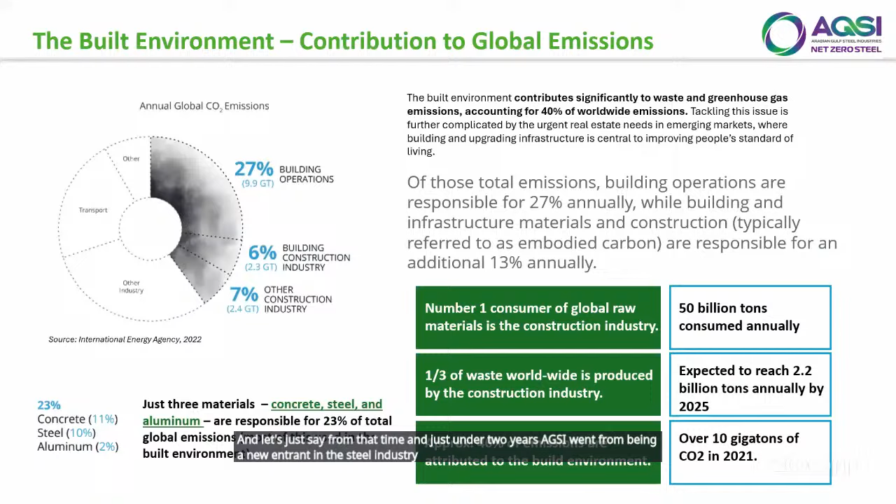Then by 2021, we decided to include our own rolling mills for making rebars and sections. And from that time, in just under 2 years, AGSI went from being a new entrant in the steel industry to the first carbon neutral steel plant.

So just to sum up our journey, we joined the UAE Sustainable Companies Pledge, being certified twice for lowest carbon emissions in the MENA region, participation in COP28 and Climate Week NYC as a net zero case study, becoming one of the chosen champions of the Industrial Transition Accelerator, focused on decarbonizing hard-to-abate sectors like steel, cement, and heavy manufacturing,

developing collaborations and partnerships with big players in the industry, like Aldar, Sea Institute, and soon many more to follow. This journey reflects our belief that industrial growth and sustainability are not mutually exclusive. With the right technologies and commitment, it is possible to scale green manufacturing in high-impact sectors.

Now we go to the key facts about AGSI. We are currently the largest private sector steelmaker in the UAE, apologies. What sets us apart is our fully integrated production model. We don't just produce steel. We manage the entire value chain, from scrap collection and processing to billet production, and finally to rolling to rebars and sections. This integrated approach has several technical and sustainable advantages.

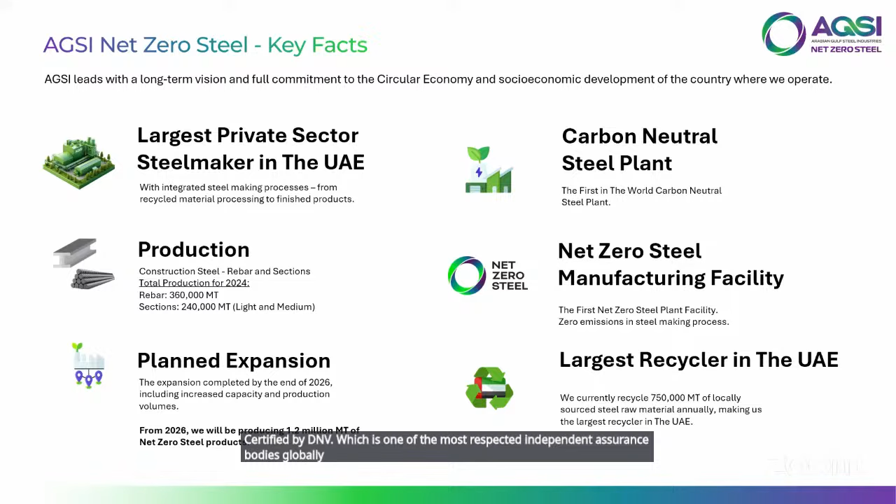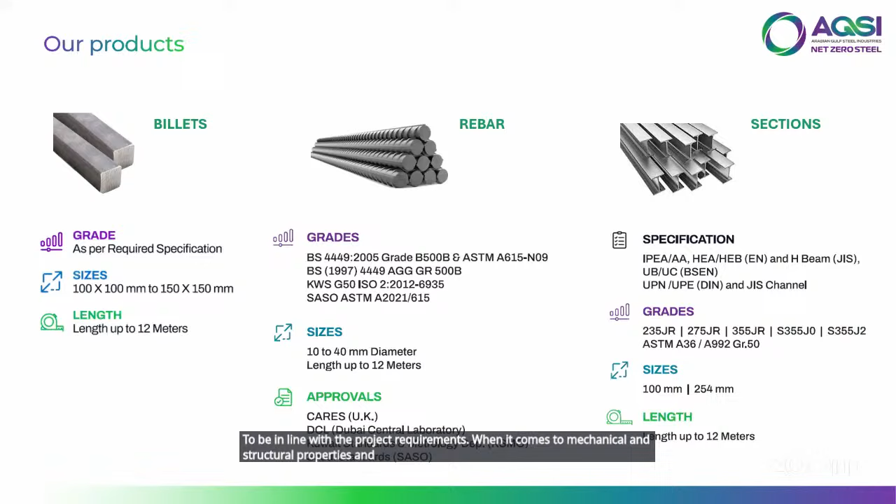So just to reiterate, AGSI produces the following: billets, rebars, and sections. All products are tailored to meet the international codes and standards to be in line with the project requirements when it comes to mechanical and structural properties and available grades and sizes. So let me go in one by one. How billets are made, first of all.

In AGSI, there are around 6 main procedures that are important for producing the low carbon steel billets prior to rolling. We begin with the 100% locally sourced steel scrap, which is brought to our facility in large volumes, minimum 50,000 tons per month. Once the raw materials are received, it enters the scrap yard where it is unloaded and sorted based on type and composition, and processed using specialized machinery like shears, shredders, and magnets to meet furnace stock

specifications. On average, we process around 1,200 tons of scrap per day to feed our steel melting operation. This ensures that there is consistent melt chemistry and energy efficiency in the furnace. Third is the most important part. The prepared scrap is then charged into our induction furnace technology. We operate a total of 4 furnaces, each with 30-ton capacity and 12 megawatt power rating.

Unlike traditional blast furnaces or electric arc furnaces, induction furnaces do not burn fuel. Instead, they use electromagnetic induction to generate heat directly within the metal. Thus, no oxygen will be required, as it will be fully operated through electricity. This results in no CO2 or other greenhouse gas emissions whatsoever, more precise control over melt temperature, lower heat loss, and faster startup times. This is the cornerstone of AGSI's net zero strategy: clean, efficient, and scalable steel melting.

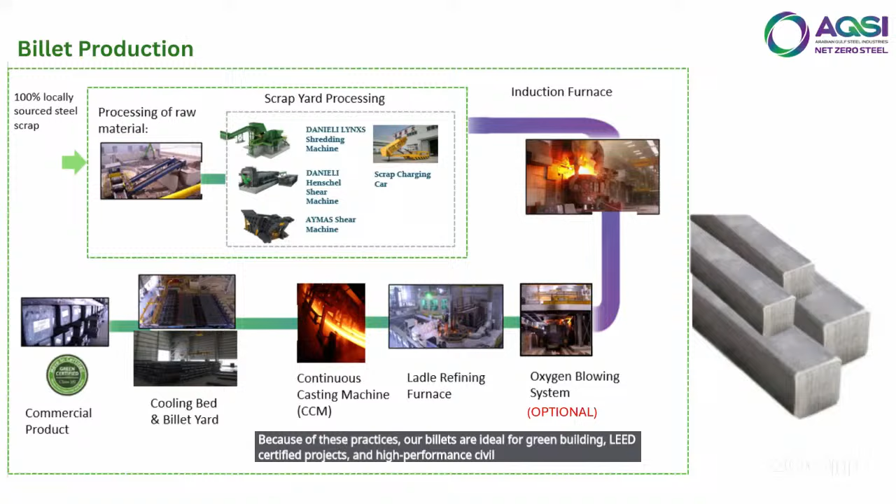Now let's delve into the rebar mill process. The first stage is the reheating furnace. Here, the cold billets are fed into a high temperature furnace where they are heated uniformly to about 1,100 degrees Celsius to 1,250 degrees Celsius. The purpose of this is to soften the billets and make them suitable for plastic deformation. Uniform heating is crucial not just for rolling efficiency, but also to prevent internal stresses or non-uniform grain structures, which could compromise the final mechanical properties.

Once the billets exit the furnace, they enter the rolling mill stands. These are multiple rolling passes arranged in sequences of roughing, intermediate, and finishing stands. This is where the billet's cross-section is progressively reduced. At AGSI, our rolling mill is designed for high throughput and dimensional accuracy. The billet is transformed from a solid square profile into the round ribbed profile of a rebar, and this happens at speeds that can exceed 15 meters per second. The rib patterns are essential for bond strength with concrete. They are rolled directly into the bar during the finishing stand phase. Rib geometry is precisely controlled as per international standards such as BS 4449 or ASTM A615.

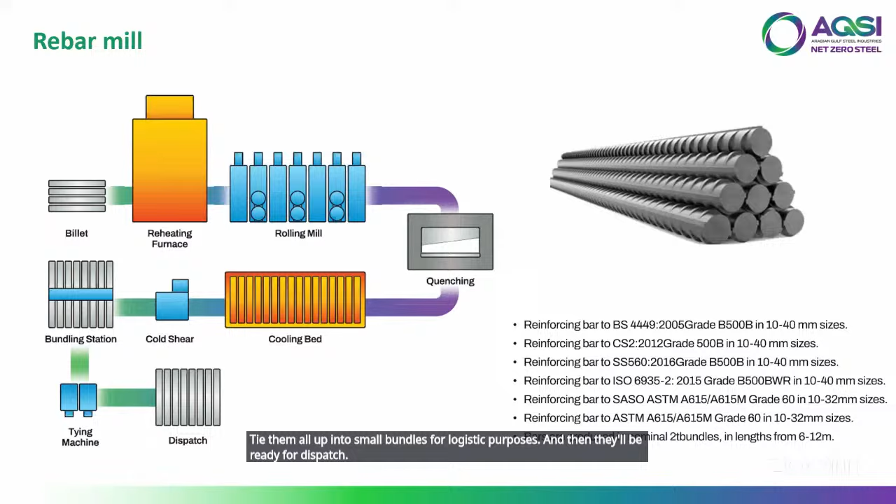Now, just to show you the insights of this process, first of all, the QST treated rebars offer superior weldability and lower carbon equivalency compared to traditional microalloyed rebars. Our rebars undergo routine tensile, bend, rebend, and fatigue tests as per international standards. We can produce grades up to 600 megapascals of yield strength, suitable for high-rise and infrastructure. This is very important because it supersedes the standard requirement. And this is because our process is fully reliant on 100% recycled scrap and zero carbon induction melting.

We don't just do these tests internally. We make sure that our findings are backed up by certified third-party agencies before commissioning to our consumers. This is an official comparison table of our full range of rebars detailing that we comply with and supersede the standard requirements. As you can see here in the mechanical properties section, our rebars are much stronger than the conventional steel.

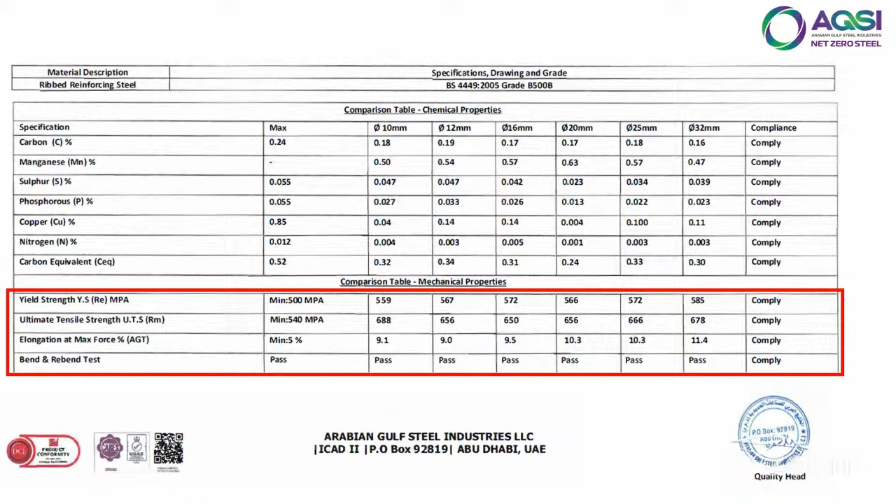Last but not least, we'll talk about the section mill. It is relatively the same as the rebars, but has some extra processes due to its complex design. At the beginning, the billets will go to the reheating furnace, and the same application applies.

After the reheating furnace, the billet enters the reversing mill. Unlike a continuous mill, this system consists of a set of rolling stands where the billet is passed back and forth multiple times, with the roll gap adjusted in each pass to achieve a desired shape. This multi-pass reversing process allows for a gradual and controlled reduction in thickness and width, which is especially beneficial when rolling complex profiles.

This also gives us flexibility in roll configurations and allows us to roll both symmetric and asymmetric sections. After the reversing process, the semi-finished profile enters the finishing mill. Here, the geometry is finalized and surface finishes are improved. At this stage, the exact dimensions of flanges, webs, or edges are refined to within millimeter level tolerances. What makes this step special at AGSI is the capability to change roll sets quickly and accommodate different section profiles.

The next step, which is the same as in the rebars, is the cooling bed, where the finished sections are laid out under ambient air. Once cooled, the profiles are passed through the straightener. This machine uses a series of adjustable rolls to correct any remaining curvature or camber in the product. Straightness is critical, especially for structural applications, and the AGSI plant is capable of achieving tolerances well within the desired standards for dimensional accuracy.

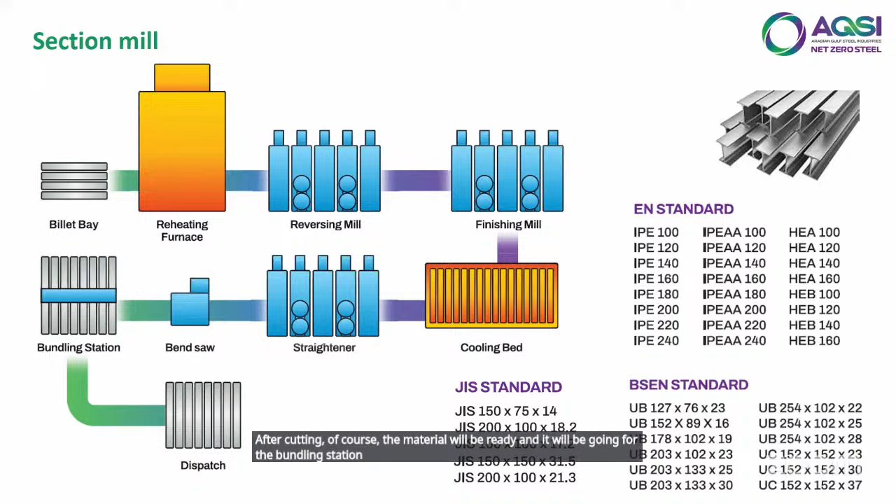So some insights on the section mill. The reversing mill setup is particularly efficient for low volume or custom profile production, ideal for infrastructure, OEMs, and modular steel systems. AGSI uses low carbon steel grades with high weldability and ductility, making them suitable for seismic zones. Our rolling is backed by mechanical testing like Charpy impact, UTM tensile, bend, and macro etching to verify grain structural integrity. Sustainability is embedded into this process where there's zero fossil fuels, zero carbon melting, and energy recovery systems in the furnace.

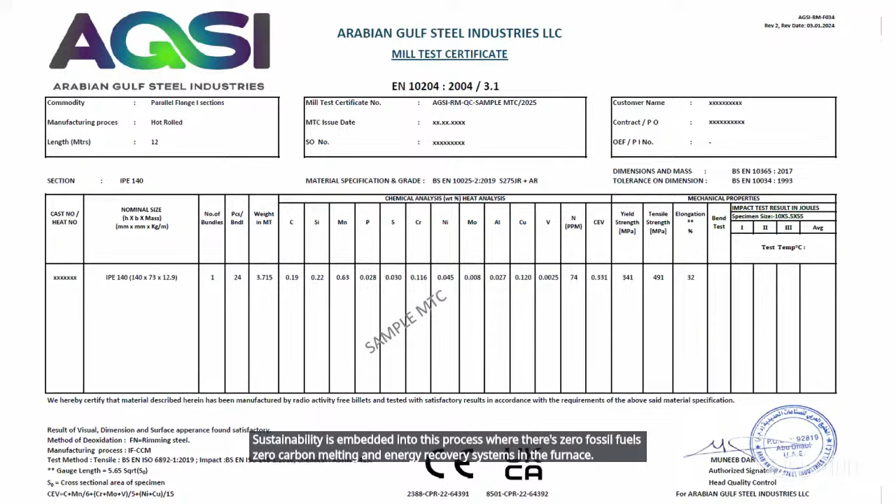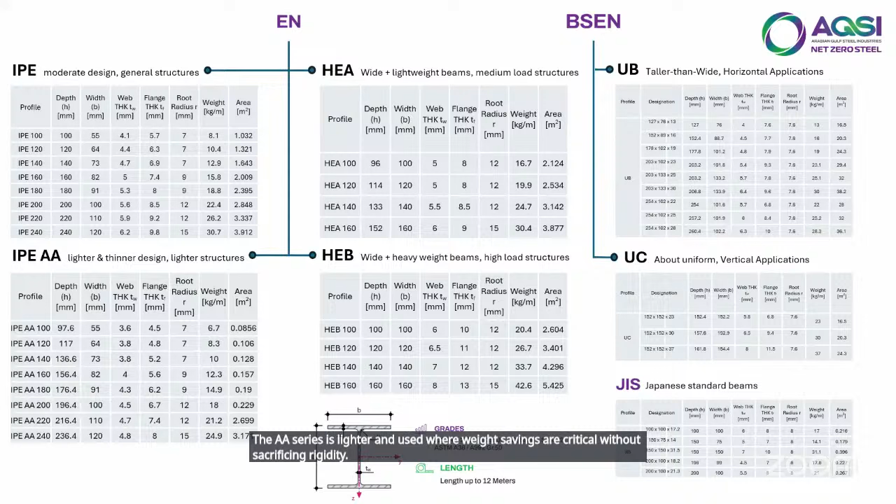Now, before I end this topic on the sections, the slides detail the sections that we offer and some of their applications. So in general, we have the IPE, IPE-AA, HEA, HEB, UB, and UC profiles. The IPE and IPE-AA beams are ideal for floor beams, secondary framing, and general structural use. The AA series is lighter and used where weight savings are critical without sacrificing rigidity. The HEA and HEB beams are wide flange beams. HEA is optimized for medium load structures, while HEB offers higher load capacity, specifically in transfer beams and bridge decks.

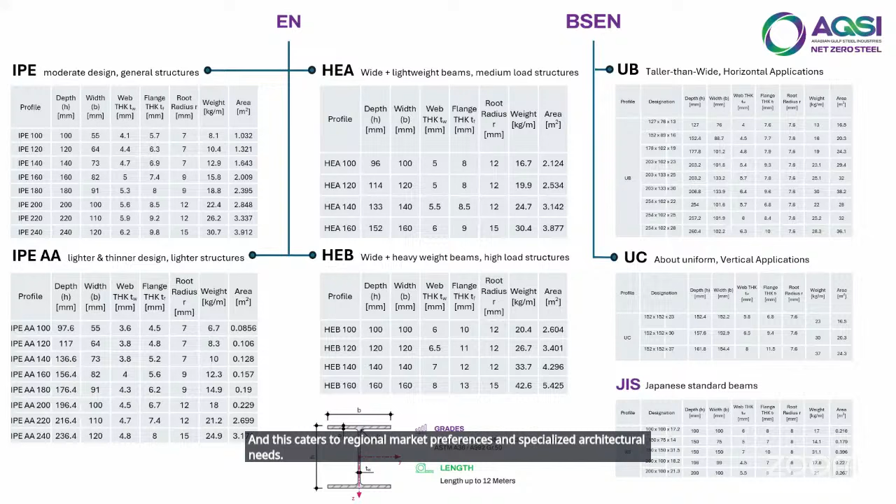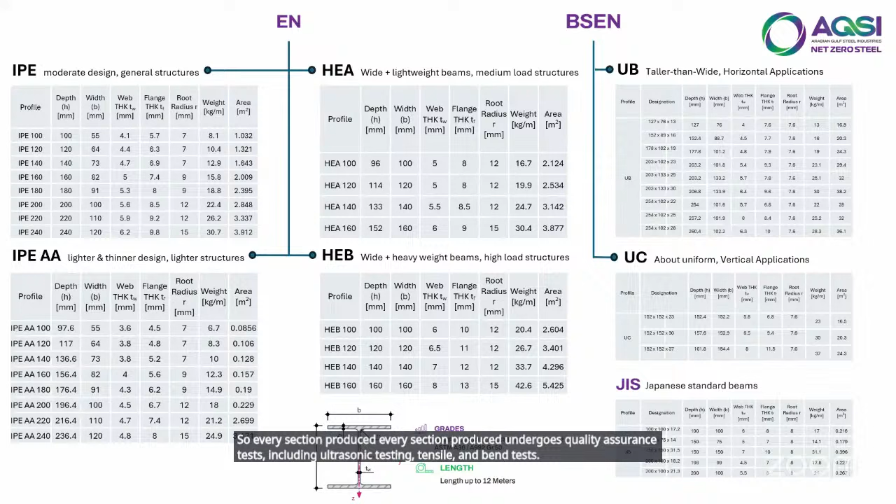UB, or universal beams, are taller than they are wide. These are ideal for spanning applications like bridge girders and long span trusses. Universal columns are nearly square in dimension and are used as vertical load-bearing members in buildings and towers. We also offer the JIS profiles, which stands for Japanese Industrial Standard, and this caters to regional market preferences and specialized architectural needs. So every section produced undergoes quality assurance tests, including ultrasonic testing, tensile, and bend tests, to guarantee performance with regional and international structural steel codes.

Just to give you an interesting fact, globally, over 630 million tons of steel are recycled annually. Every ton of recycled steel saves around 1.5 tons of carbon dioxide, 1.4 tons of iron ore, 0.6 tons of coal, and 0.05 tons of limestone. Using recycled scrap reduces energy consumption by up to 74% compared to using virgin iron ore. AGSI processes around 40 to 50,000 tons of local scrap per month, enough to build the steel structure of a Burj Khalifa-sized tower every 45 to 50 days.

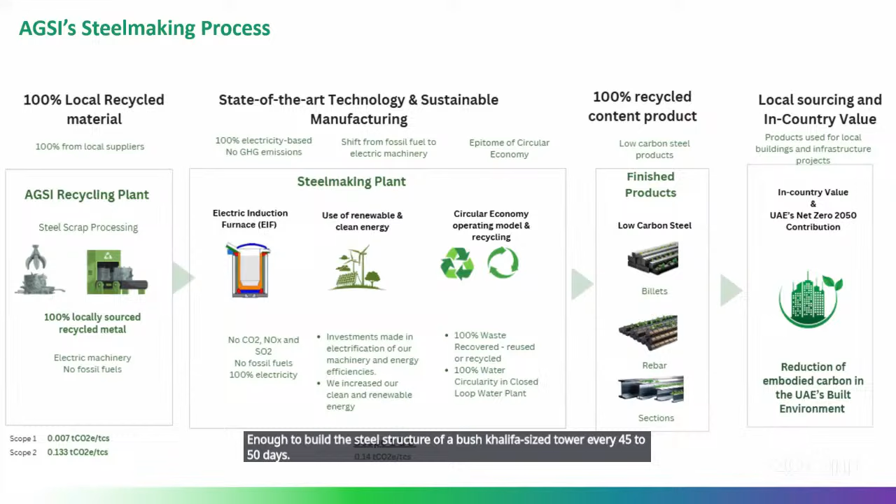Our carbon neutrality is the result of real, measurable reductions in process emissions. As mentioned before, the key to this lies in our use of the induction furnaces, which operate without fossil fuels, unlike traditional blast furnaces, which rely on coke, a high carbon fuel, to reduce iron ore into molten iron. Because we rely exclusively on 100% recycled scrap and use renewable electricity for minimal offsets, we eliminate Scope 1 and Scope 2 emissions from the production cycle.

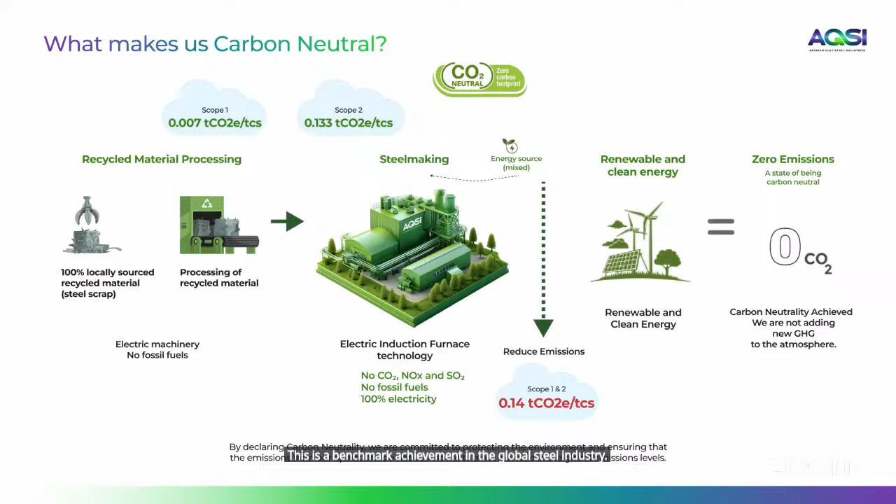Another method of secondary steel making is the EAF route, or the electric arc furnace route. True, this method will use 100% recycled steel scrap, but the arc furnace will require oxygen to provide the heating and efficiency needed for a well-produced finished product.

Primary steel making is still being used, but not recommended, especially in this region. They would need to extract molten iron from iron ore, and this requires huge amounts of energy and oxygen, resulting in immense loads of emissions.

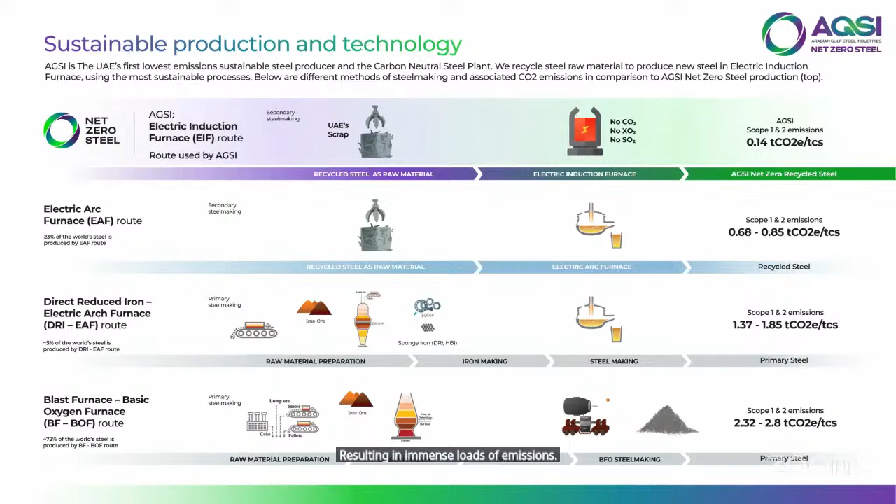As mentioned before, we commissioned independent audits by DNV to validate our net zero claims. These audits were conducted in line with two gold standard protocols, the ISO 14064-3 for greenhouse gas accounting, and the PAS 2060 for carbon neutrality certification. These certifications confirm that our operations from raw material input to final product produce zero net emissions.

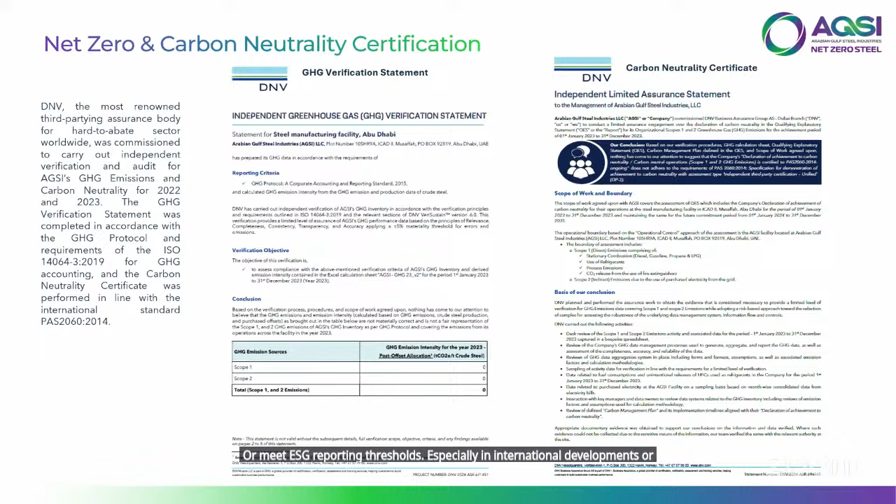What's even more important is that these reductions are real, measurable, and replicable, not based on future promises whatsoever. That's critical for projects that want to secure sustainable financing or meet ESG reporting thresholds, especially in international developments or LEED certified buildings. So just to show you our other product quality conformity certifications in line with the local requirements for projects in the GCC and even the UAE.

Now we go a bit about ESG. Our model follows the principles of infinite circularity in steel production. We use 100% recycled steel waste, avoiding virgin ore extraction. All waste and byproducts like mill scale, slag, and fumes are reused or recycled into industrial inputs like cement.

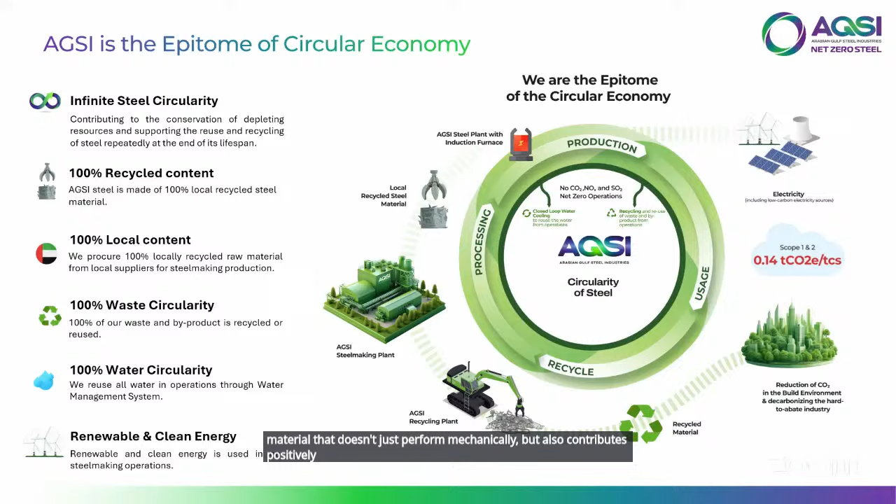Most importantly, our electricity supply is powered by clean and renewable energy, which is a critical enabler of low emission steel. This means specifying material that doesn't just perform mechanically, but also contributes positively to your project sustainability and life cycle assessments.

AGSI's strategy is not just about carbon reduction, it is a complete environmental, social, and governance transformation, aligned with the UNGC, or United Nations Global Compact, Sustainable Development Goals and the 2030 Agenda. Some of these goals include, but are not limited to, industry innovation and infrastructure, responsible consumption and production, climate action, clean water and sanitation, affordable and clean energy, and partnerships for the goals. And these involve collaborations with climate groups and industrial platforms. This global alignment gives added assurance to international consultants and developers looking to source from socially responsible suppliers.

Now, how are we contributing to LEED? Why sustainability for buildings? That's the main question here. Sustainable buildings reduce energy and water use, cut carbon emissions, and lower operating costs. As a result, they can boost property values up to 26%, increase occupancy rates to 96%, and tap into a fast-growing green finance market, while also enhancing brand value and demonstrating leadership in sustainability.

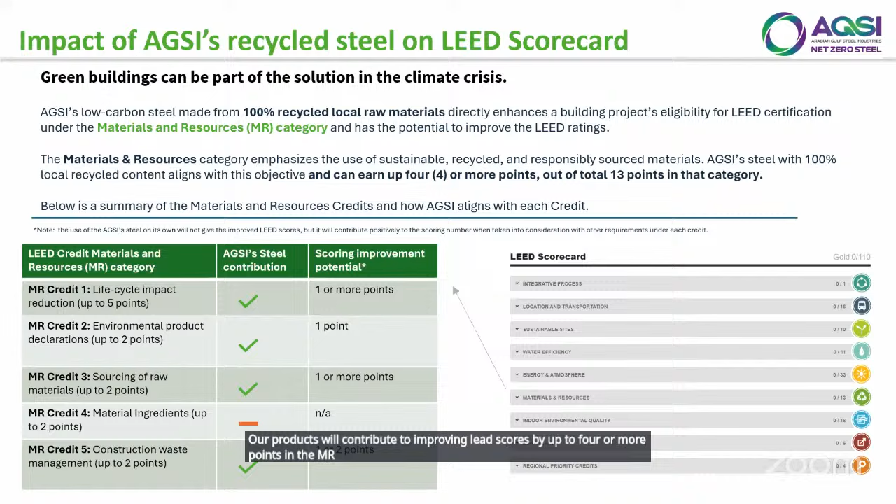So let's break this down a bit further. For credit 1, the life cycle impact reduction, from a total of 4 options under this credit, our low carbon steel supports the 4th LEED option, which is the whole building life cycle assessment. Using AGSI steel can help earn at least 1 point, especially when a project meets 3 out of 6 impact categories like global warming potential, depletion of non-renewable resources, or acidification.

Credit 2, the environmental product declarations. We offer verified EPDs for our products.

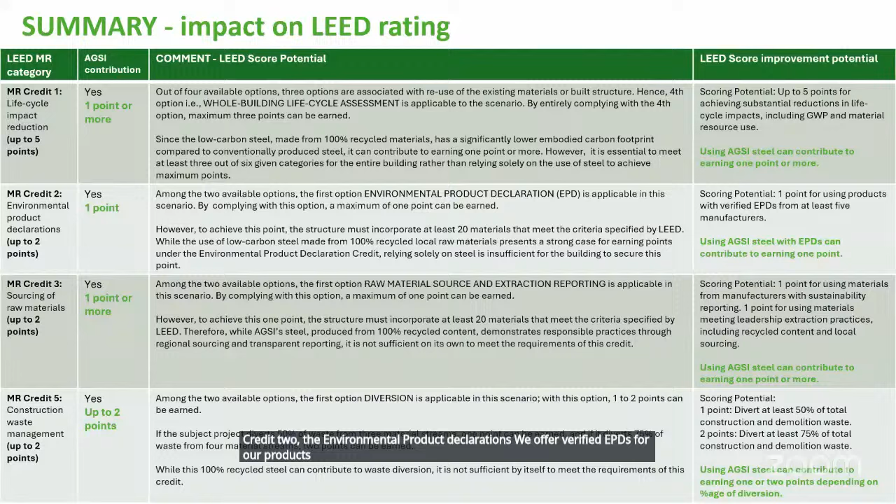While a project needs 20 materials to fully earn this credit, AGSI steel counts as one of them and can help earn 1 point. For credit 3, sourcing of raw materials, there are a total of 2 options in this credit. Our 100% recycled, locally sourced steel supports both of these options, and this contributes to 1 or more points for responsible extraction practices and local sourcing transparency.

The last credit, credit 5: from the 2 options available, our fully recycled steel supports the first option of diversion efforts. If the project diverts 75% of waste from at least 4 streams, 2 full points are achievable. In short, AGSI steel is not just structurally sound, it's a material that supports project certification, lowers embodied carbon, and enhances investor confidence in green assets.

I'll give you an example of a LEED certified office that is about 50,000 square meters in area. This office, if it uses our steel, could gain up to 7 LEED points in the materials and resources category and benefit from 26% higher asset value.

Before I conclude, I'd like to address some facts on why this matters. The UAE's Barakah nuclear plant in Abu Dhabi incorporated over 100,000 tons of steel. If produced using AGSI's net zero process, it would have saved over 200,000 tons of carbon dioxide emissions, equivalent to taking 43,000 cars off the road for a year.

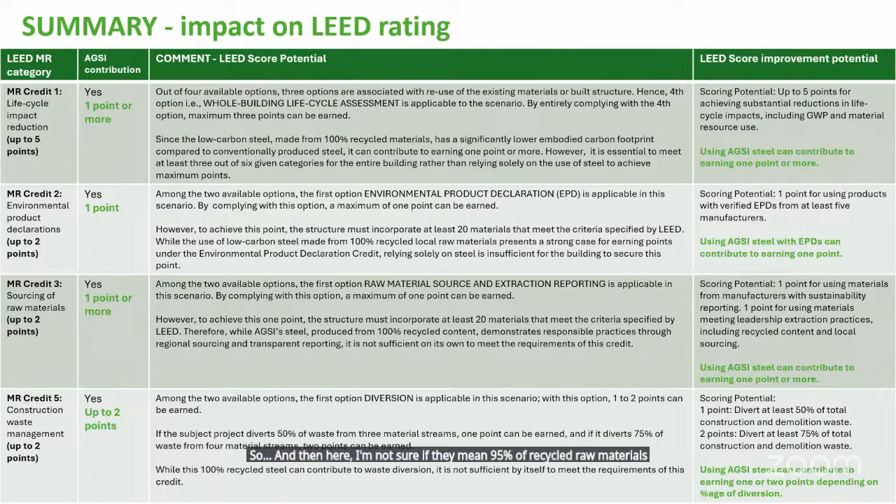Okay. Other steel suppliers' EPDs say that the steel is made with 95% recycled materials. How advantageous is AGSI in achieving the credits compared to them? So here, I'm not sure if they mean 95% of recycled raw materials or recycled content. Now, in our case, yes, our raw material is basically 100%.